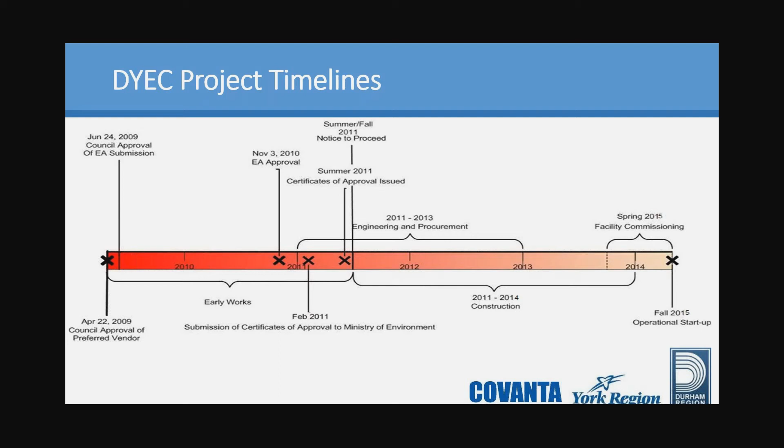So I spoke to the timeline, how we actually got to our approvals. Once we got our certificate of approval in 2011, we moved into the notice to proceed. We had an RFP process where we selected Covanta as the preferable design, build, operate company. They started the design build commencing in 2011. It was a 40-month project. We are currently in the commissioning stage, and we estimate that commencing in September of this year, we will complete our acceptance testing and move into commercial operations by the end of this year.

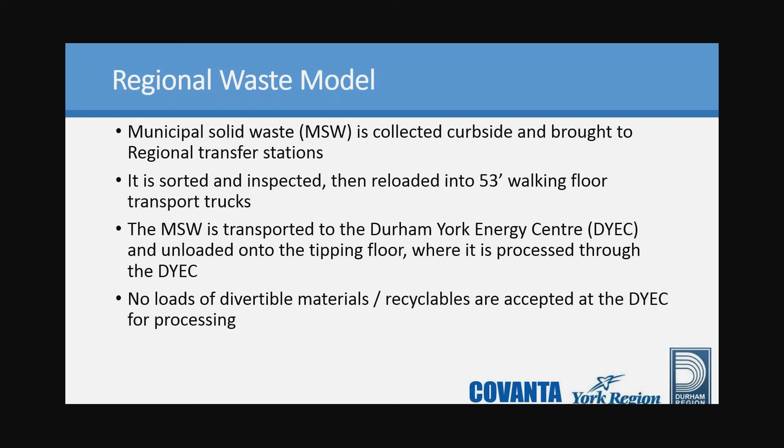As Joe mentioned, we process a maximum of 140,000 tons of post-recycled waste per year, which generates approximately 17.5 megawatts of energy—enough, given Durham Region's consumption patterns, to power approximately 10,000 homes annually. The facility is one of the newest in North America, the first built on a greenfield site in over 25 years, and it is the cleanest and most efficient energy-from-waste facility in North America, if not the world.

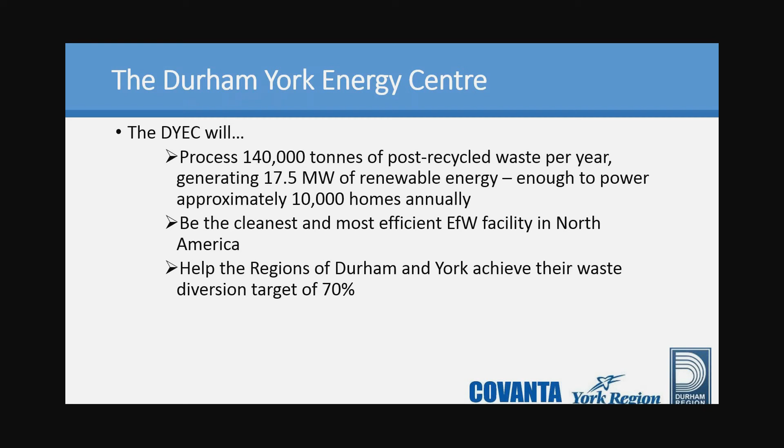Our hope is that it will help the regions of Durham and York achieve their diversion targets of 70%. So a little bit about Covanta.

We operate about 46 energy-from-waste facilities globally, predominantly located in the United States. However, we have a few in Europe and in China, and we're building our newest facility in Dublin, Ireland. That facility is an 800,000 ton per year facility, so it's much larger. Generally speaking, the Durham York Energy Center is one of the smaller facilities in our fleet.

We have two facility models: the first is a service facility, which is the Durham York Energy Center model, where the facility is owned by a municipality and operated by Covanta. Our second type are merchant facilities, generally owned by Covanta or split-owned between Covanta and a local municipality, but where Covanta has more flexibility in the operation of waste coming into those facilities. Together, across those 46 facilities globally, we have some pretty impressive statistics.

We collect enough ferrous metal—magnetic types of metal—to build over 90 CN Towers per year, and enough non-ferrous metals, such as aluminum, to produce over 1 billion aluminum beverage cans per year. That helps put into context not only the diversion from landfill, but the associated diversion in terms of mining, production, and smelting of new ore that's avoided because of our ability to recycle those metals instead of sending them to landfill.

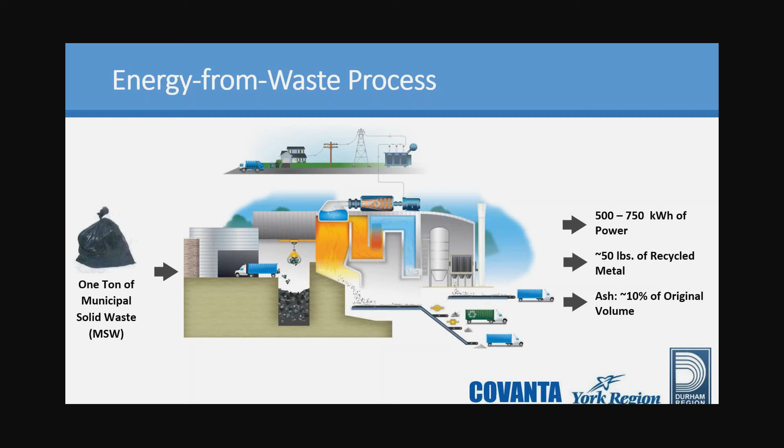We keep that on site for 5 days, although our testing at this point has shown that it's fully encapsulated and non-leachable within 1 day. So the technology at this facility has been shown to be incredibly effective at reducing emissions.

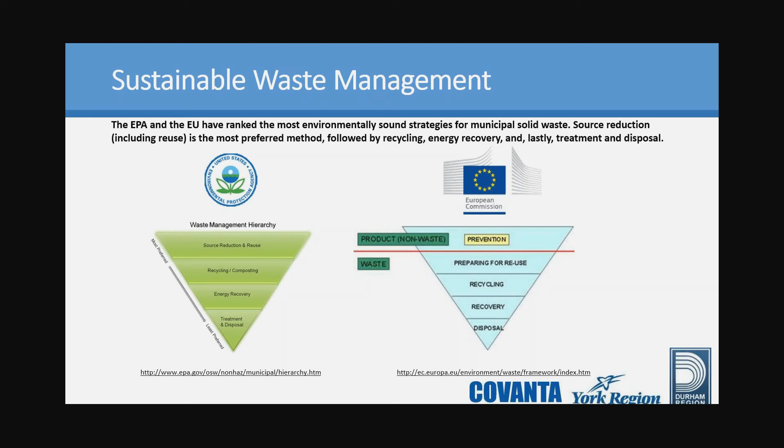The sustainable waste management, in terms of the EPA and the European Union, have ranked the environmentally sound strategies for managing waste in an inverted pyramid diagram. Prior to disposal, if you can recover anything out of the waste that is possible, that is the preferred method. So at this facility, we send very little away to landfill, and we recover energy from as much as possible.

In terms of putting into perspective with other energy from waste or renewable energy sources, EFW facilities take up the smallest footprint of land. On average, approximately 0.7 acres per megawatt for EFW facilities versus landfill gas to energy, which of course have the footprint of the landfill, so they're quite large. Solar farms also have quite a large footprint, and so do wind power farms, even more than solar.

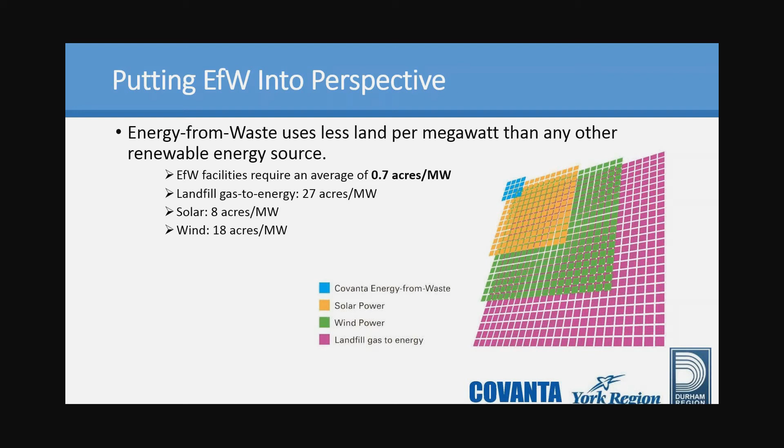So for the amount of energy that is produced, energy from waste facilities are one of the most beneficial renewable energy sources.

Here's a summary of our air emission standards, where we compare the Durham York Energy Center in the green column to the other guidelines that are available globally. We have the Ontario A7 guidelines, the US EPA guidelines, and the EU guidelines, as well as the guidelines associated with our newest facility that is under construction in Dublin. You can see that we meet, if not exceed, all of the comparable emission targets that have been forwarded by the EPA and the European Union.

Our testing thus far has shown that we are meeting or exceeding even the standards that are set for this facility. So we're very proud of the construction of this facility and the technology that's in use here.

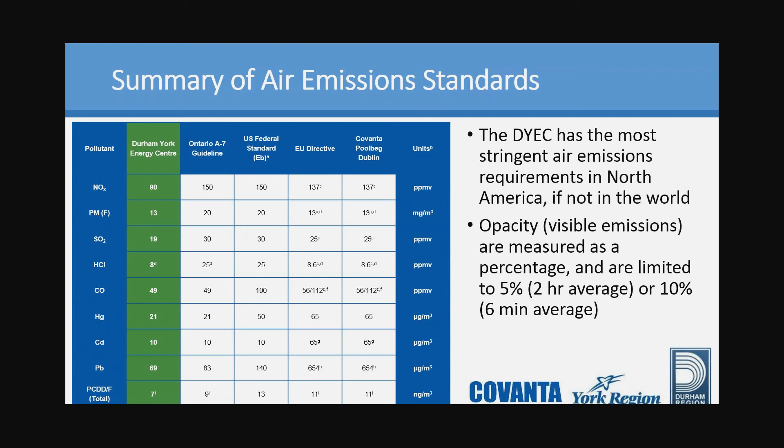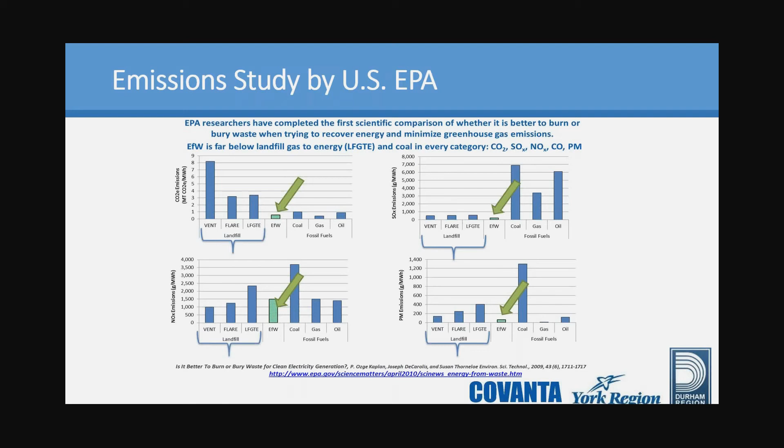An emission study by the US EPA looked to compare whether it was better to burn or bury waste when considering greenhouse gas emissions. If you look where the arrow is pointing, you'll be able to see that EFW facilities, generally speaking, have the lowest emissions when you're comparing them to landfill of the same amount of waste. So it is a much better method of managing our waste, certainly locally, instead of transporting the waste.

In terms of cap and trade, this is a discussion that's underway right now in Ontario. Ideally, cap and trade, we would look to offset carbon credits under the Kyoto Protocol Clean Development Mechanism, where 40 other EFW projects are included thus far, as well as the Verified Carbon Standards program.

So far, we have 3 Covanta facilities in the U.S. approved under this scheme. Currently, right now, EFW is excluded from the European Union Emissions Trading Scheme. It's also excluded from the Regional Greenhouse Gas Initiative, nor is EFW included under the Quebec Cap and Trade Program under their Appendix A for that program.

Originally, EFW was included under the California Cap and Trade Program, but once lawmakers there realized that it wasn't an effective way of including EFW under cap and trade, it's been exempted because of the consistent showing of GHG reduction. So putting it under the cap and trade program just wasn't applicable, and they started realizing that.

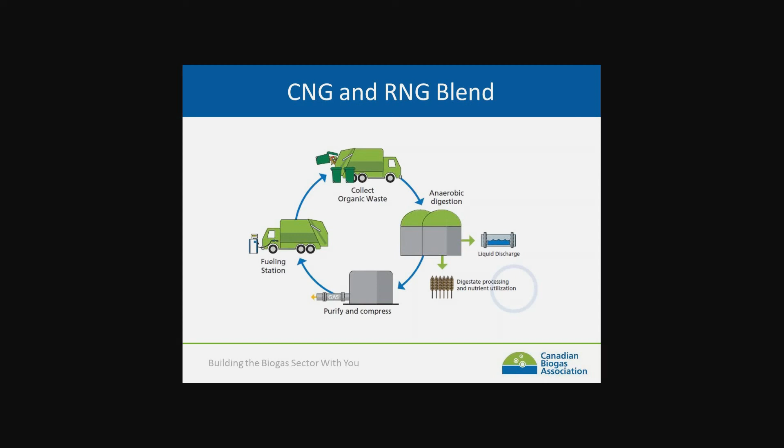This is the important part when you're trying to sell this concept to your colleagues or your political masters who have to balance budgets. The economic argument for RNG as a vehicle fuel is quite strong, in that, first of all, this fuel is really suited to return-to-base fleets that are converting to natural gas anyway. So you've got your waste trucks.

When you blend in compressed RNG, which incidentally is about the same price as gasoline and diesel, you see that blending at a 90%, 10% ratio only increases the price by about 5 cents a liter. And the economic case is very strong still against gasoline and diesel-powered vehicles.

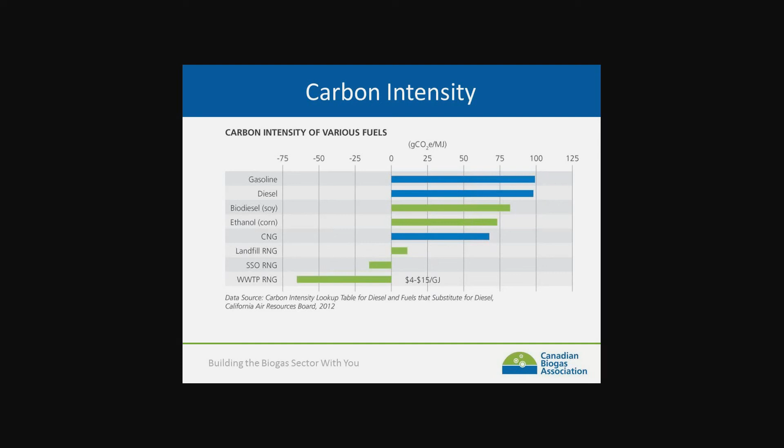So any municipality that does go down that road of looking at RNG as a vehicle fuel, you won't be first. We've got Nanaimo, BC, which currently generates electricity from their landfill gas, but they are in the process of constructing RNG upgrading facilities, and they'll be fueling the garbage trucks used in Nanaimo with their landfill gas. That project was funded from a number of sources, including the Federation of Canadian Municipalities.

Surrey, BC is building an SSO treatment facility that will fuel waste trucks as well, under a P3 business case. They built the business case based on comparing gasoline and diesel prices, and were able to make the case to convert their waste trucks to CNG and RNG.

Hamilton's wastewater treatment facility is complete, and Frank will discuss that. Niagara is looking at converting its wastewater treatment facility to produce RNG as a vehicle fuel now; they had an RFP that has been awarded. London is studying the opportunity to collect SSO and convert it to RNG as a vehicle fuel.

As the project was in the engineering stages, one thing that had to be considered is what type of volumes we would anticipate. You recall one of the earlier slides mentioned how we see population growing in years ahead. So the consulting group we had at the time provided us with this information to give us an idea of what kinds of volumes we anticipate when that growth happens. That was key, because as we went about making the selection for the equipment, it's important that you size the system up appropriately so it can operate in this particular sweet spot. As a result of that process, that design and consultation, we looked at 5 different purification processes.

The water scrubbing technology that we have today was selected. The system, size-wise, has the ability to process up to 10,000 cubic meters per day, for up to 1,200 homes.

As I said, we do inject gas into the Union Gas distribution grid. Gas quality is rigorously monitored at the unit itself by both the City of Hamilton and by Union Gas. A fair bit of engineering went into the gas metering station. It's both pushing and pulling, if you will, as far as natural gas is concerned, so that we can be fairly accurate with the volumes and measurements of gas going in and out.

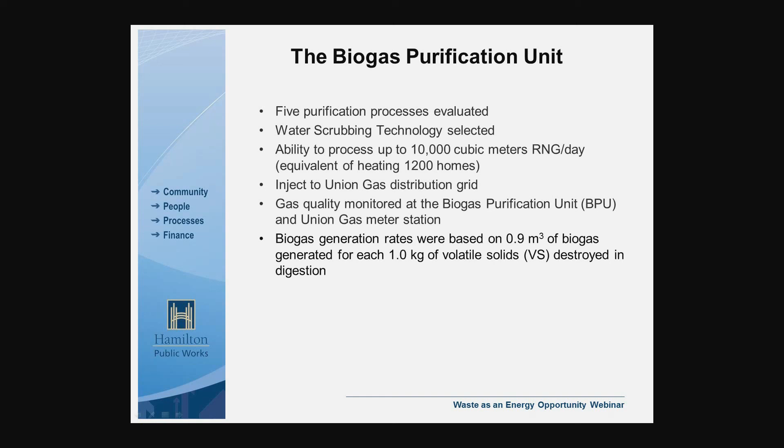To make that happen, there are of course some administrative parts to it. As I said, we're producing renewable gas with that system, so there is a contractual commitment. We have to advise Union Gas as to the volumes we produce on a daily basis, and we have certain tolerances that we have to deliver. So their forecasts for their requirements are known to them, and they can manage their system as well.

Over time, we've learned the hard way as to the kinds of volumes we need to forecast and what conditions set up for maximum gas production. Our operators at the wastewater treatment plant have become very adept at managing the treatment process so that we can increase the yield for methane, which allows us to produce more gas.

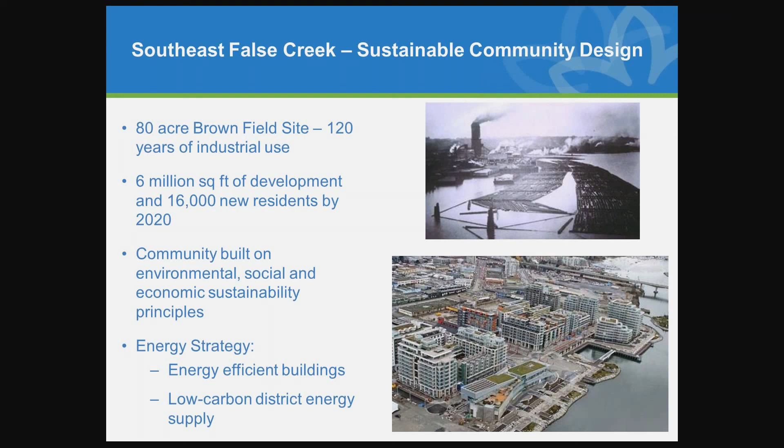So, energy efficient buildings, and we made the decision to install a low carbon district energy system to supply all the heat and hot water to the neighborhood. So this is Southeast False Creek for you, anybody who's been to Vancouver. You can see a substantial neighborhood, centrally located, close to downtown. Sorry, moving back here, that picture was taken, looks like about 2000.

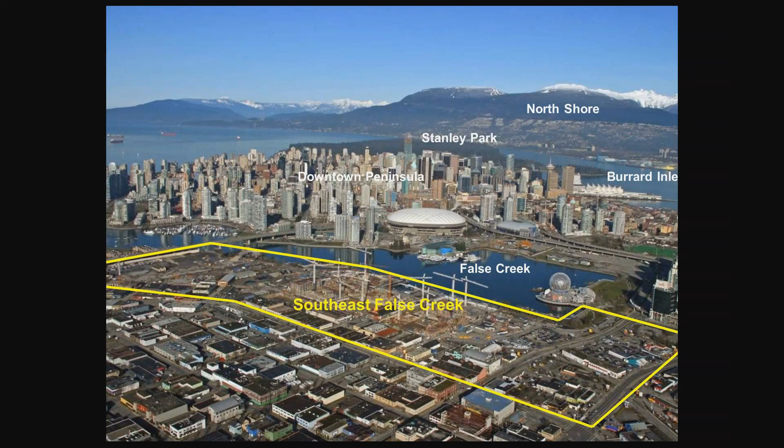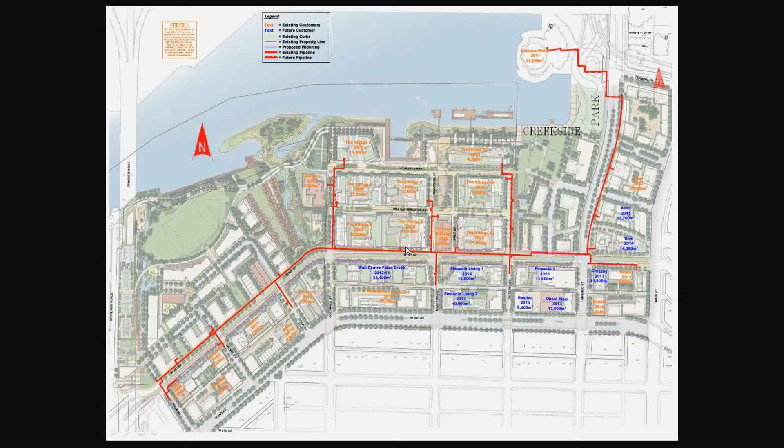The City of Vancouver, in the province of British Columbia, all utilities are, in terms of their rates and their economics, regulated by the BC Utilities Commission, with the exception of utilities which are owned and operated 100% by a government body. So in this case, we're regulated by our city council rather than the Utilities Commission. The operations are managed by the City of Vancouver Engineering Department. But the way the utility works is basically all the capital costs associated with building the utility and the operating costs to run the utility are recovered through the rates that we charge to customers.

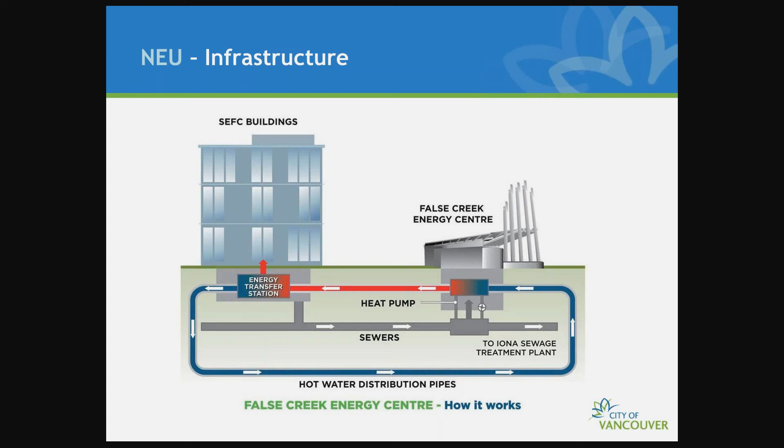Inside each building there's an energy transfer station. That energy transfer station pushes that heat into the building systems, and as I said, we typically provide both heat for all the space heating and ventilation make-up air and for the domestic hot water in the building. And then it's a two-pipe system, so the cooler water comes back to the plant where it picks up more heat. So that's a really simplified explanation.

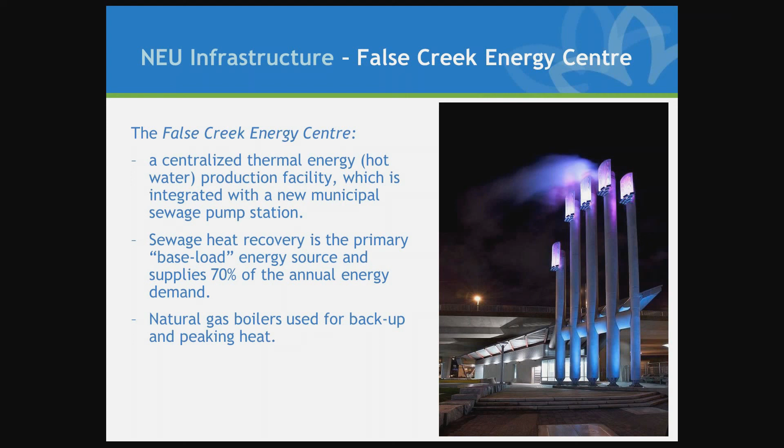So the False Creek Energy Center, that's a picture of it on the right, is the central component of the system. As I said, we recover heat from sewage. That provides about 70% of the heat to the system. The remaining 30%, we use natural gas boilers, which we use basically to supplement the heat that the low carbon technology can provide. So it's a peaking and backup service. It supplies heat on the coldest days when the sewage heat recovery system can't produce enough energy, and it supplies a backup role in case the heat pump goes down for maintenance or failure or something like that.

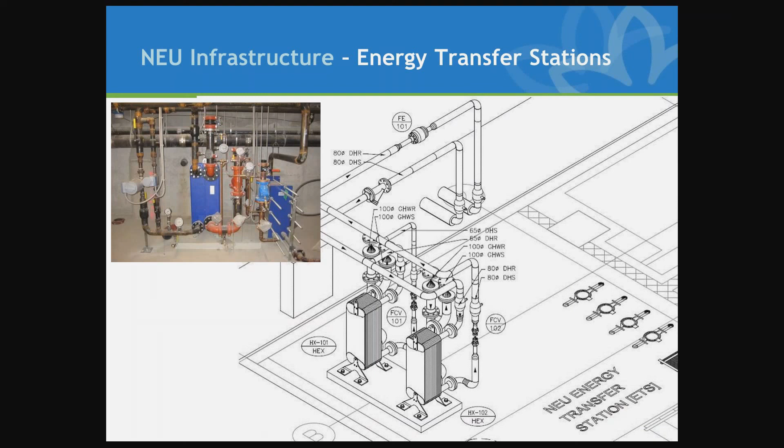Current status of the utility is that we're basically hitting all our performance targets, which are to get 70% of the heat from sewage and reduce greenhouse gases from a business as usual case by about 56%. Last year we were at 68% of our energy from sewage, which led to a greenhouse gas reduction of about 55%. And we have economic targets, of course, to keep the utility competitive with business as usual, and that is the case if you compare it to any other low carbon energy source. The rates are the same or less.

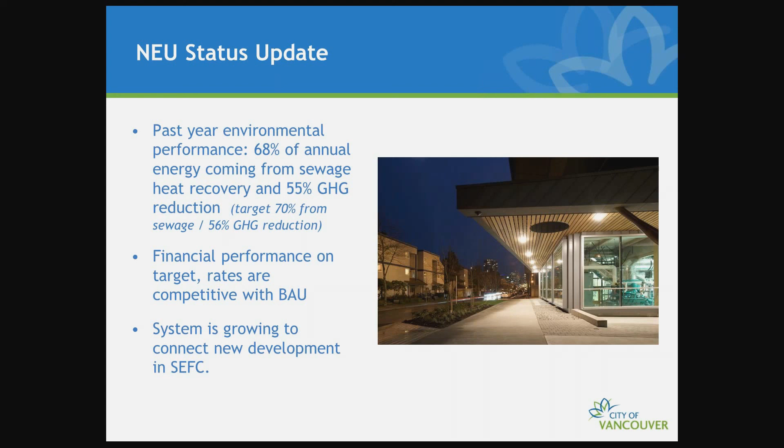And of course we grow every year. We add new buildings, connect new buildings within the neighborhood to supply heat and hot water to those buildings.

So just a summary of the benefits. All the energy is locally sourced from the neighborhood. It's renewable, low carbon. The system, of course, is adaptable. It's a low temperature hot water system, so any other waste heat source in the neighborhood would be connectable to the system, and that's really what we've achieved, is building infrastructure which can accept energy from a wide variety of sources. It's cost effective in terms of supplying low carbon energy to those buildings, and it provides competitive rates while supplying a return on investment to the city.

So I'm just going to switch track a little bit and talk about where we're headed from here. With the success of this utility in Southeast False Creek, the city's establishing and implementing a district energy strategy across the city. This is sort of a classic

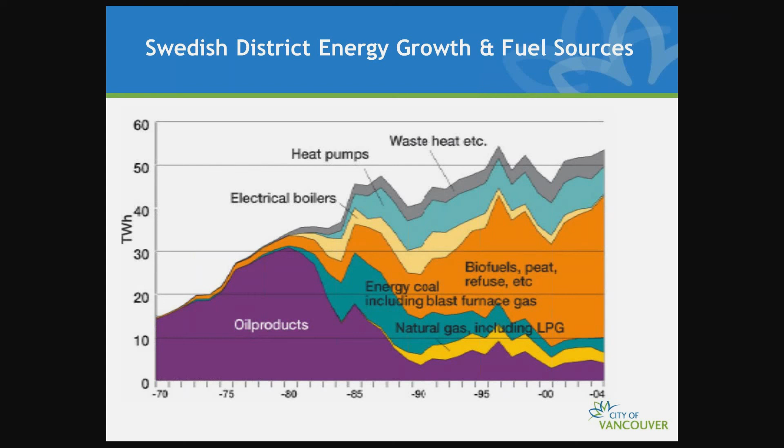graphic from a Swedish example of district energy, where they began. I won't walk through every single color in the graph, but think of the stuff on the bottom, the purple, as being fossil fuels, and the other colors towards the top as being renewable sources. You can see how over time, this is from 1970 until 2004, just how the diversity of supply and building a platform which can accept a variety of waste sources has led to a dramatic reduction in the amount of fossil fuels that they need, and create a real high level of not only use of renewable fuel, but a diversity of supply.

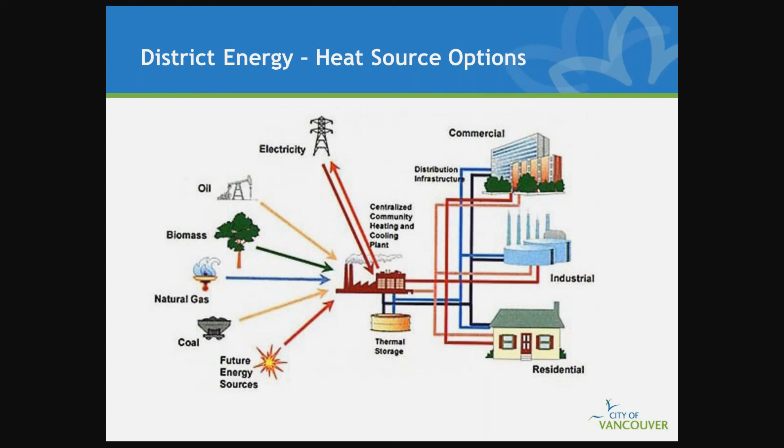Yeah, it's just a graphic which sort of highlights the number and variety of energy sources that are connectable with a system like this. So electricity is often used, oil, biomass, natural gas, coal. We have solar thermal systems, we use sewage heat recovery, and of course waste heat from industry, and the energy supply is useful by commercial, industrial, and residential customers.

In 2012, the target was to reduce community emissions by 6%. Our real targets begin in 2020, where we need to, through the Greenest City Action Plan, reduce community emissions by 33% below 2007 levels. By 2030, all new buildings must be carbon neutral, and by 2050, we need to reduce community emissions by 80%.

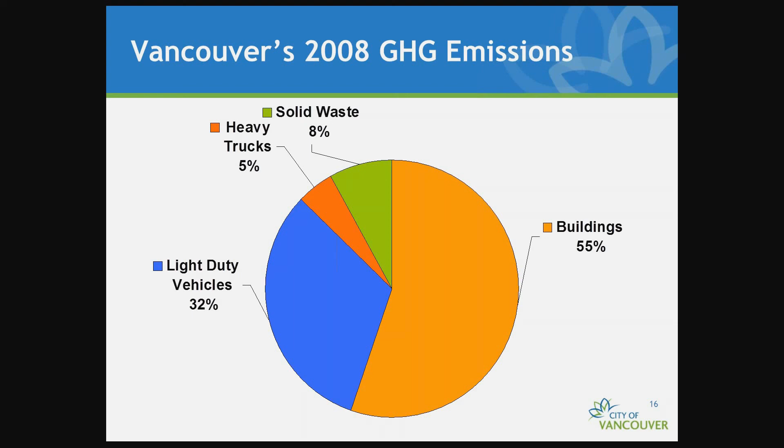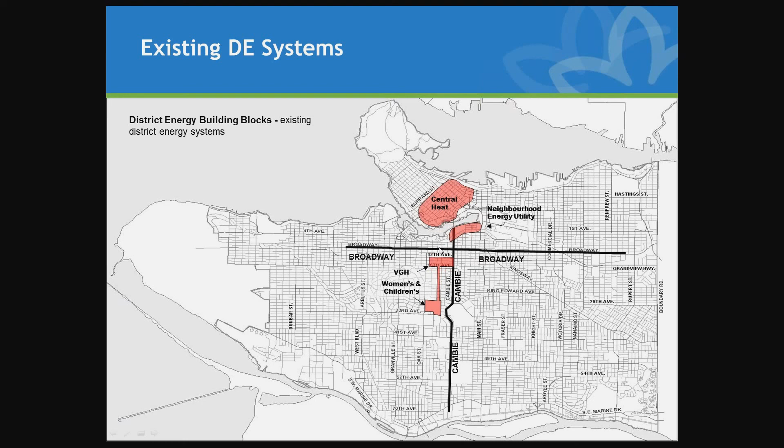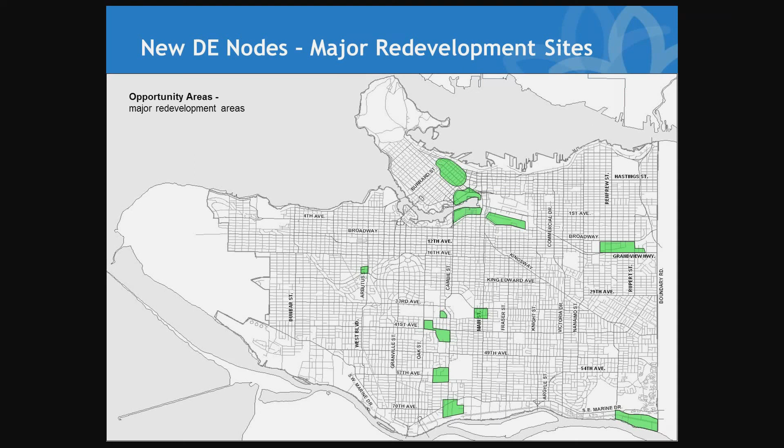So the city's strategy is to, through rezoning and other municipal tools, develop new neighborhood energy systems downtown, along the Cambie corridor, and along the Broadway corridor, using whatever technology is appropriate. Downtown will use the existing steam system, while in other parts of the city, particularly farther down Cambie and along Broadway, there would be new hot water systems.